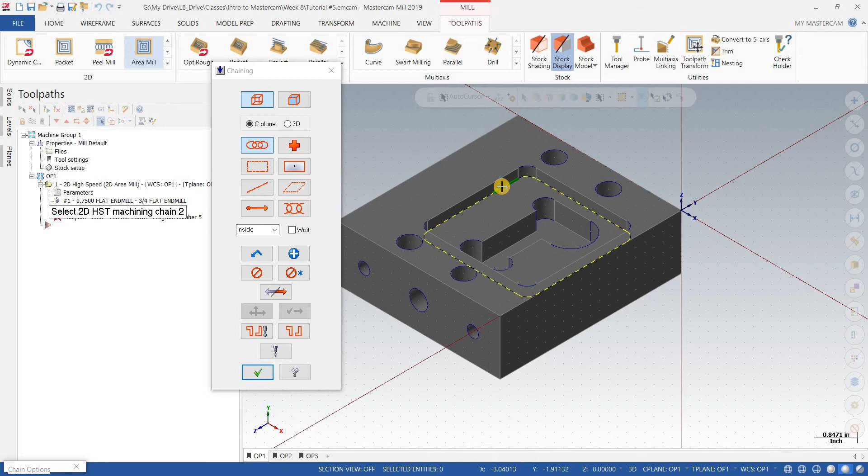We're going to start out by area milling this top pocket. Hit the drop down, area mill. We're going to have stay inside because this is a pocket. We definitely want to stay inside on this one. We're going to pick our machining region. We're going to have construction plane set, and we're going to pick this pocket right here. We can preview the chains, make sure it's doing what we want.

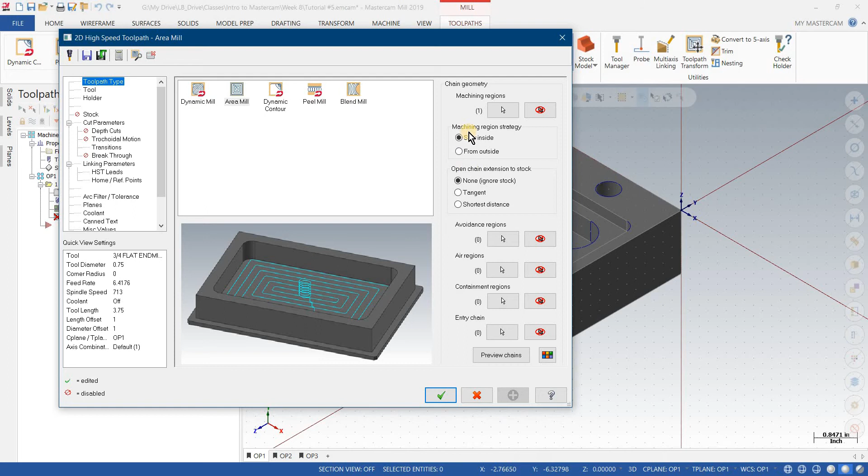So once again, here's our toolpath type. It's an area mill. We can look over here. You can see our machining regions. We're staying inside. Don't need to extend to stock. If we wanted to see again, preview the chains, you can see right there. Moving on down, we're going to pick our 3/4 inch flat end mill, which happens to be right there. And let's just give us a comment. Machine top pocket.

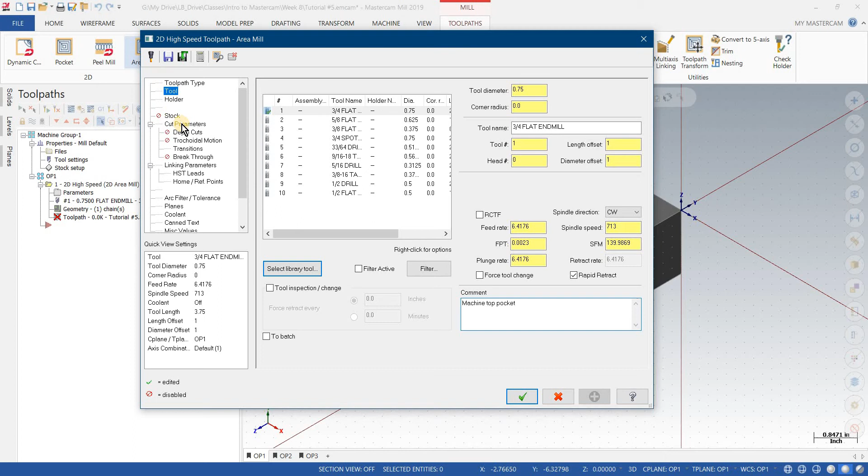Let's look at our cut parameters. Now here's what the tutorial has us doing. It has us turning on corner rounding and leaving nothing on the walls and leaving nothing on the floors. So we're using this as a finish pass, but we're turning on corner rounding. This can work, but it can also leave stock in places that you don't expect it to be because this corner rounding is cutting corners. So depending on your tolerances, this is probably not a good idea.

But then again, I would probably be leaving a little bit on the walls and coming back with a contour to clean anything like that up. So in which case I would be using corner rounding, but I would be coming back later to contour the walls. But we're going to sort of follow along on the tutorial on this. We're not going to leave anything on the walls, and we are going to turn corner rounding on.

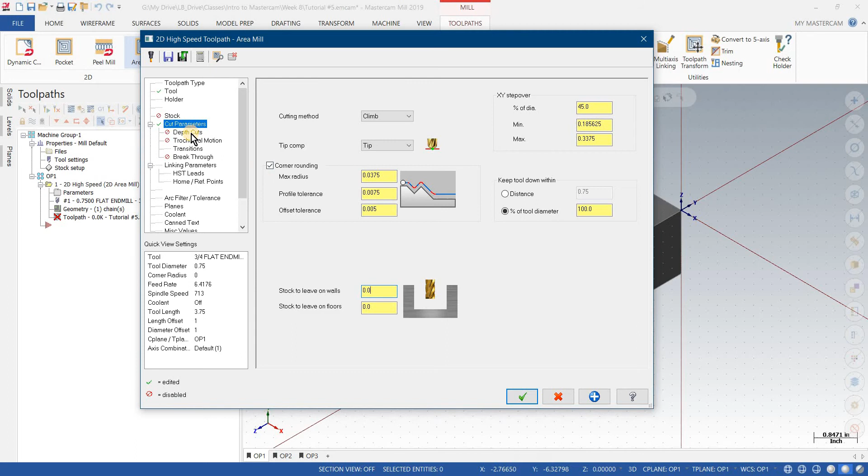Depth cuts. This is an area mill. It's not a dynamic tool path. So we're going to set our max rough step to 1/4 inch with a 50 thou finish step. Entry method. The tutorial has us using an entry helix and setting it to 0.5. I do not like that, we have a 3/4 inch tool.

So if we set our radius to 1/2 inch, we're going to leave a boss in the middle as we're helixing down. And then we're going to have to machine that boss off, which is kind of a pain. So I'm going to set my entry helix to 0.37 so that I don't leave that boss. I might also just do profile ramp, which I kind of like. But for now, we're going to helix down at a 0.37 radius.

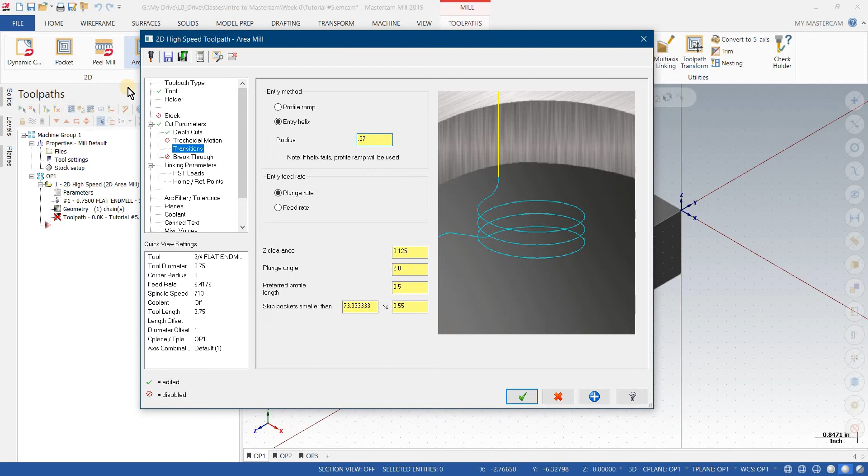Linking parameters. We're going to set our clearance plane to 1.0. Our retract to 0.5, our feed plane to 0.1 incremental. Top of stock is 0 absolute. Depth is going to be 0 incremental.

Now this is important. We're using incremental for a reason because we're going to copy this tool path and change the geometry. So by having it set to incremental, it associates it with the selected geometry rather than an absolute 0 of the part. This allows us to copy the tool path, just change the geometry and reuse settings, and the depth will follow whatever geometry we select. Let's go ahead and preview the tool path. You can see what's going on there.

Now let's take a moment and take a look at this tool path. I have said multiple times that area mill is an old tool path. There's really no reason to use area mill and that you should mostly use dynamic. This is sort of true and sort of not. It's certainly easier to program using dynamic, but let's compare the two tool paths and see the differences.

You see an area mill, it's a nice predictive tool path. It just keeps going in predictive circles, or squares in this case, but it's stepping out, taking another pass, stepping out, taking another pass. And let's compare that to a dynamic mill and see what that same pocket would look like if we dynamic milled it.

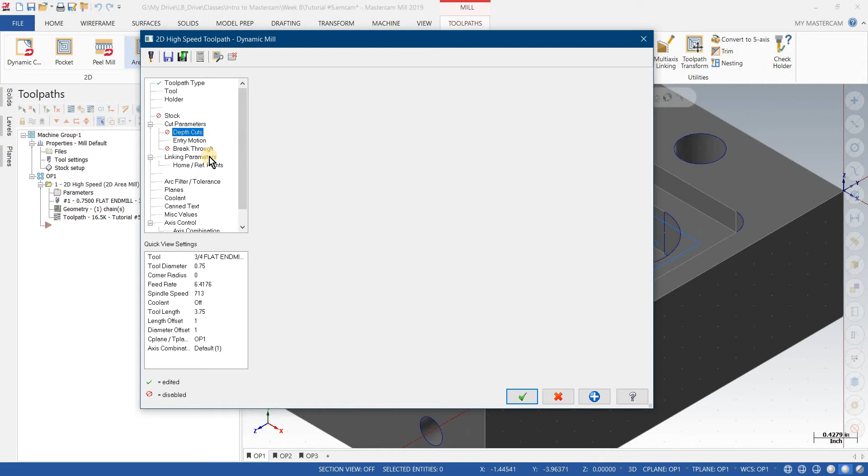So we're just going to change that to dynamic mill right there. We can turn off depth cuts. Doesn't matter, come down, everything else should be the same. Take a look at this. Now look at that tool path right there.

So what dynamic mill is doing is it's doing some flowy paths to keep from over engaging the cutter into the corner. It's coming around, leaving some material, and then coming back at a different angle to minimize cutter engagement. And this is what it does to allow you to use the full flute length of the end mill, and we don't have to do so many depth cuts.

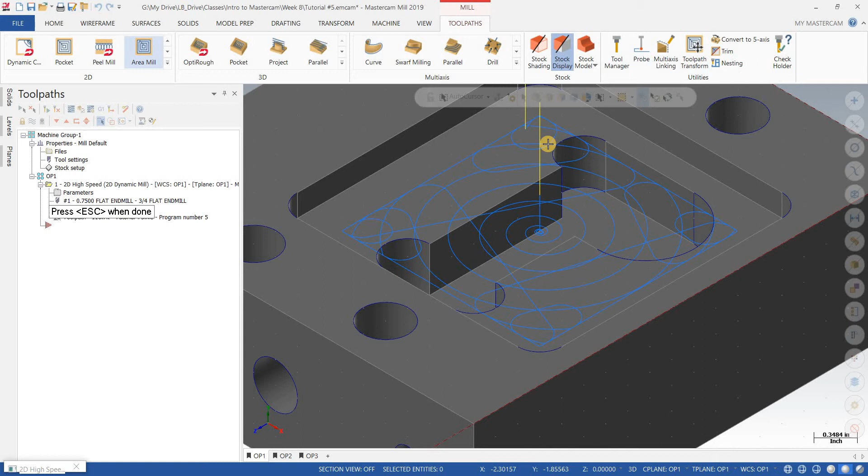But what it does is it leaves kind of this flowy pattern on any floors that you're machining. Some people may not like those flowy patterns. It can also be a little bit slow when you could get by with an area mill. So let's go back and change it to an area mill.

Now we see this tool path, and let's backplot this. And let's look at how long this tool path is going to take. So that's 5 minutes and 29 seconds. Now that's ridiculous. That's because we use the default settings in Mastercam for speeds and feeds. But we can still use it as a comparison to look at the time for an area mill versus a dynamic mill. So let's remember that, 5 minutes, 29 seconds.

Let's go back to our parameters, tool path type. Now we're going to change that to a dynamic mill. Rebuild that, backplot that, look at our info, 7 minutes and 34 seconds. So 2 minutes slower to machine this pocket with the dynamic mill.

Now, if we had to take multiple steps down with the area mill, if this was a 1-inch pocket, now dynamic mill becomes a big advantage because we could go all the way down and do one pass with the dynamic. But in these short pockets where using the whole flute length isn't advantageous, an area mill will be faster because it won't be going back and doing that flowy tool path around.

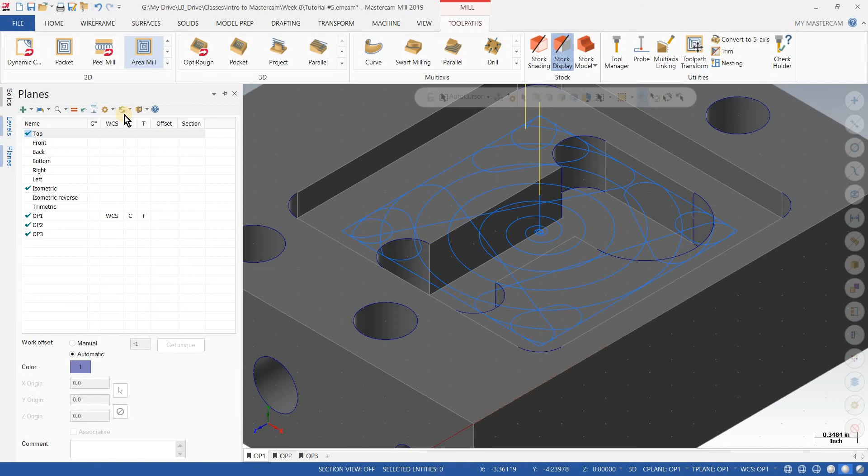So dynamic mill is a little faster for programming, but the disadvantage is it can leave an interesting pattern on the bottom of the part that some people don't like, and it is actually slower in areas where you wouldn't be doing multiple depth cuts with the area mill anyway. So let's go back and change that to an area mill because that makes more sense. Rebuild that tool path so we can see it.

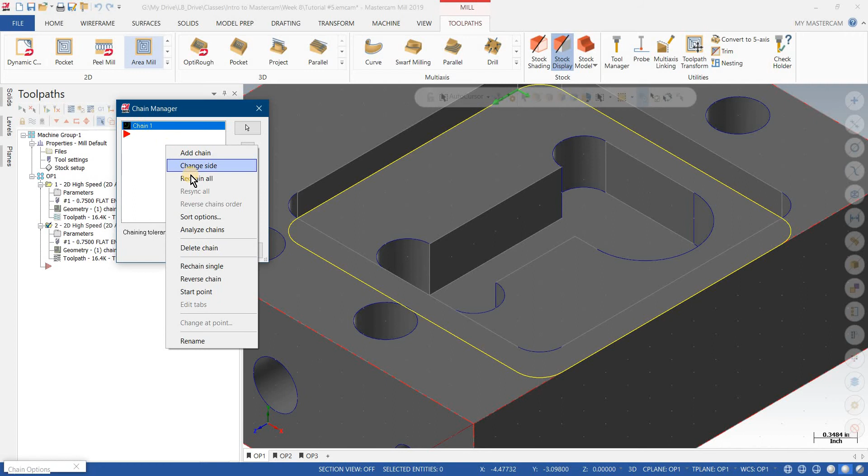And now we're going to use the same area mill to machine that bottom pocket. So let's just right click here, drag down to here, and say copy after. Let's drag our red arrow down so new toolpaths are created in the right spot. Then we can click on our geometry. We're going to change the machining region. Now we're going to be at the bottom of this pocket, so we need to say rechain all. Click down there. So there's a new pocket that we're going to be machining.

That's good. Okay, but we need to go into our parameters. We're not going to get down there with a 3/4 inch end mill. We're going to go down there with a 5/8 inch end mill. Cut parameters, I think everything else can be the same. We're not changing that. Depth cuts, oh, we need to turn depth cuts back on, 0.25.

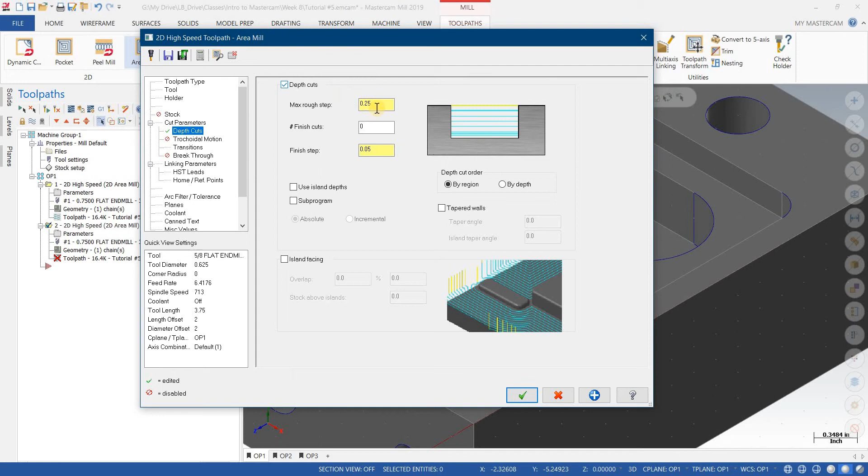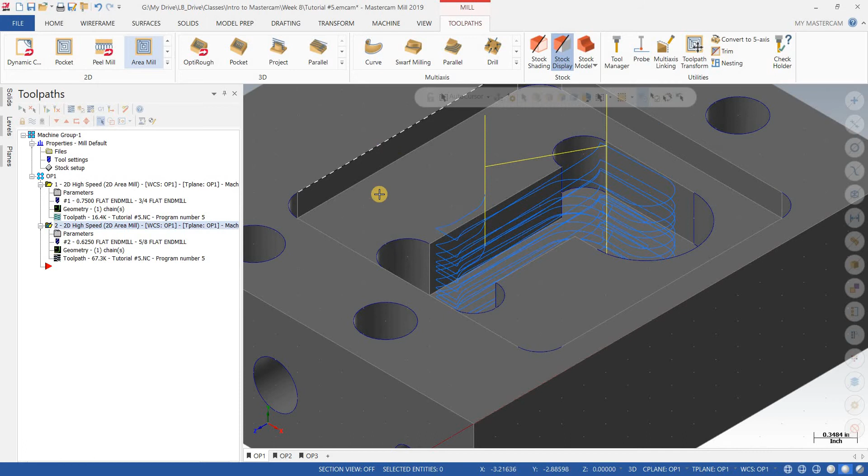Transition, entry helix. This is not going to work on such a narrow pocket. We're going to change this to profile ramp. It's going to save us a lot of time, and we wouldn't be able to helix down there anyway. Linking parameters stay the same, 0 incremental, so that we machine this pocket here. And let's preview that. Notice how it's following the profile of our pocket all the way down. Okay, so that's roughing in these two pockets with a 3/4 and 5/8 end mill.

So let's go ahead and copy these two. We need to finish these with a smaller end mill to get, for example, these corners and areas where the end mills wouldn't be able to get in. So we have both of these selected. And I'm going to right click, drag to the red arrow, let up, and say copy after. Drag our red arrow down.

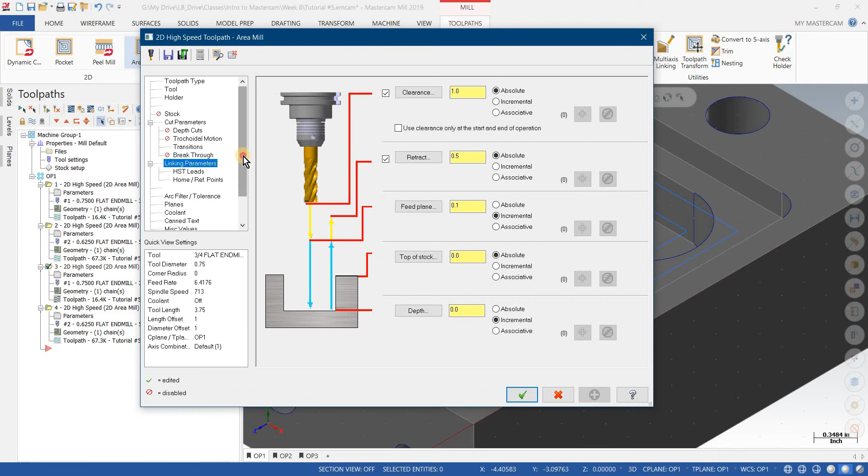So let's go ahead and modify this first one. The chain is going to stay the same. The geometry is going to stay the same. But we're going to come up here and change our tool to 3/8. And now we're going to use this stock parameter. We haven't used this stock parameter much. So we're going to turn on rest material. What this is going to do is remove material that was left behind by another operation.

If you select all previous operations, it will be huge. It's going to take a ton of time. The computer is going to have a really hard time doing that, and the more toolpaths you add, the harder it's going to be because it's going to keep analyzing. So what we want to do is select one other operation and just select that first toolpath because that's the pocket we're working with.

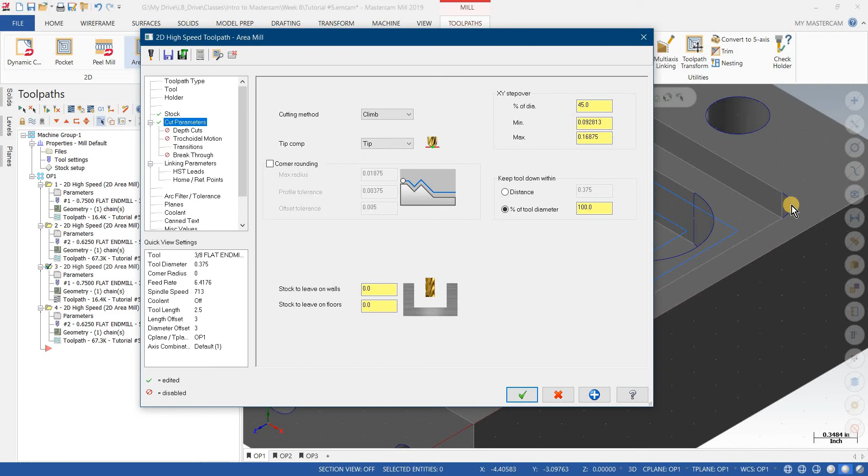Everything else pretty much stays the same. Corner rounding is on. Let's turn corner rounding off so we can get into those corners. We're only going to be doing a little bit right over here. Linking parameters stay the same. Entry helix. Let's take a look at what that looks like. Yep. So we're just going to come in and clean up these corners where the other end mill couldn't make it.

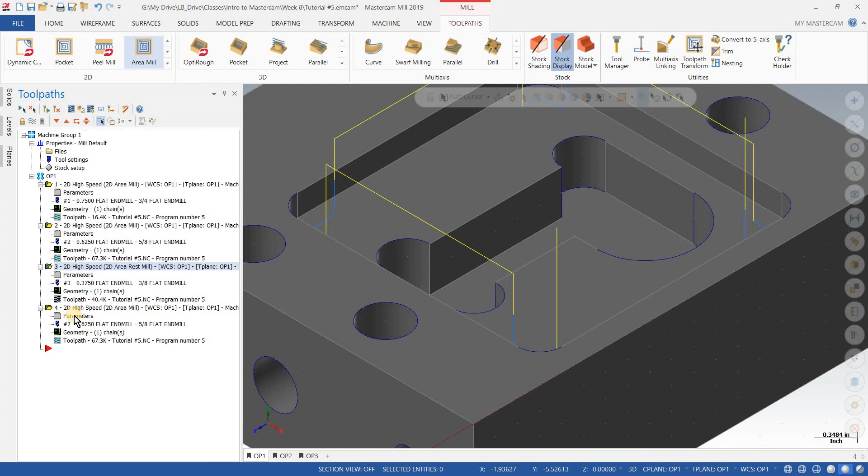And now let's do the second one here. Parameters, tool, 3/8" flat end mill, turn on stock, rest material, one other operation, second operation, everything should stay the same.

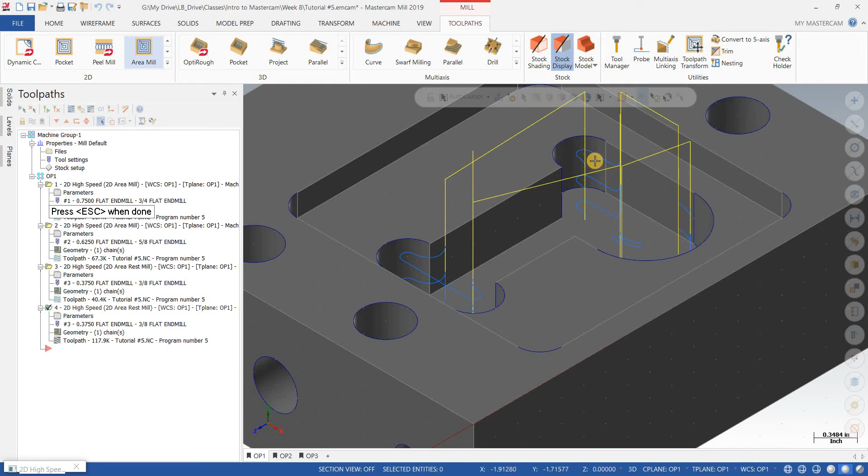See what that looks like. So there again, coming in, we're doing 3 passes in each of these corners. Not optimal. I think a dynamic mill or a contour going to full depth would make that look better, but this is going to work and it's going to give us our part. The green checkbox out of there. Off we go. So now we need to drill these 4 holes.

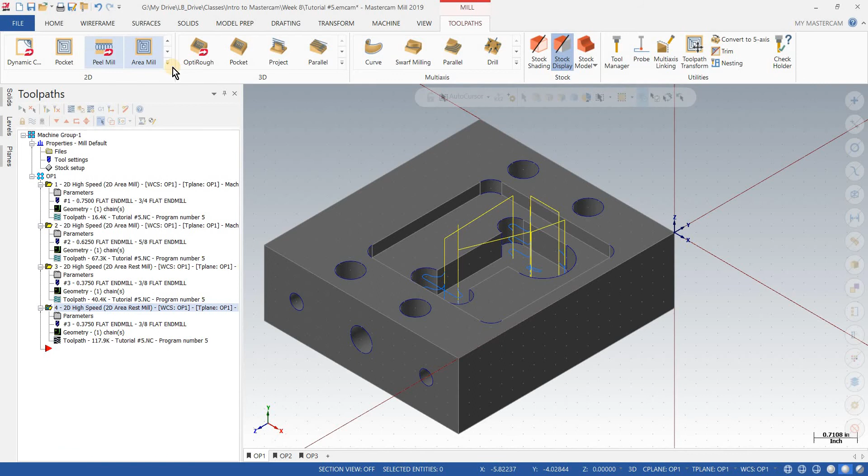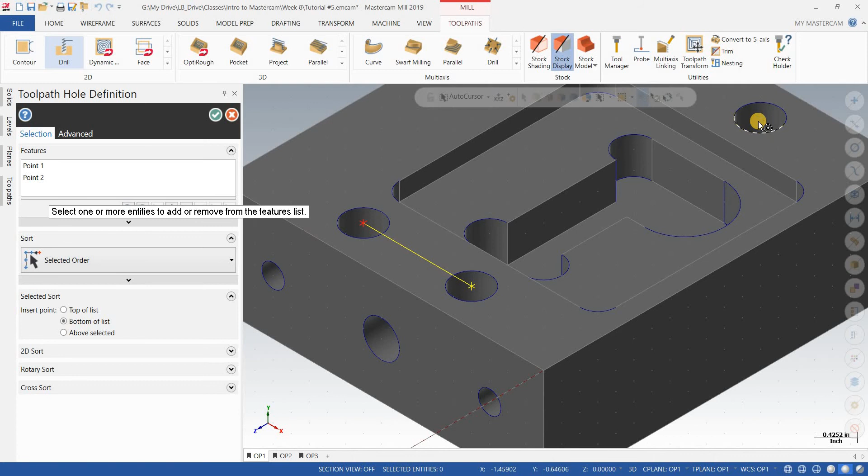Drilling toolpath. Let's unpin that so we can get a little more room in here. There's a little cursor that shows center of hole. Click on that. You're going to come over here. You want to see the cursor showing the center of that arc. Come over here. Boom.

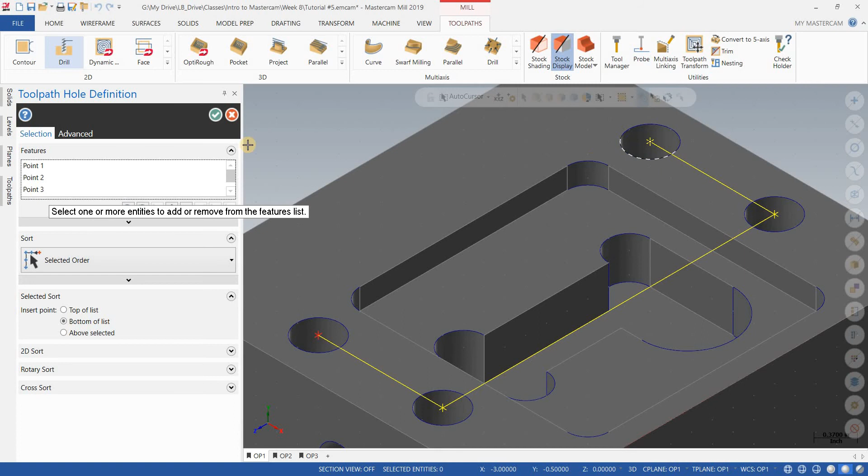So let's see. If I were to click right there, notice it clicks on the side of the part. I have to wait until I see center of hole. So I'm now going to click there, like that. And now I'm going to go in and delete my hole 4. I'm just hitting the delete key there to get rid of that mistake hole. So now I have 4 holes. 1, 2, 3, 4. Good to go.

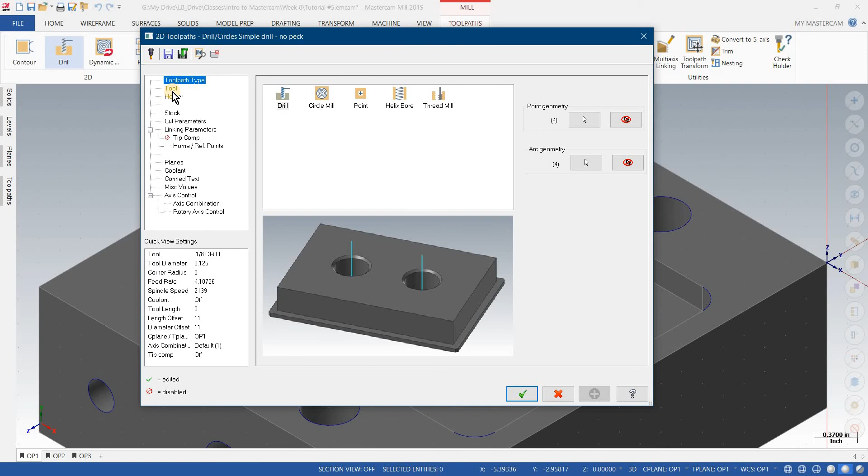Okay, and let's look over at our tutorial and see what size drill we're using. I'm assuming because we're going to start out by spot drilling the holes. So that means our tool is going to be our 3/4 inch spot drill. Cut parameter is going to be drill counterbore. We're not going to dwell.

Let's go back and give it a comment. We're going to have to go back and add some comments to the other one since I forgot to add comments and since I copied toolpaths. I have some bad comments in toolpaths, which would be really confusing for the operator. Spot drill the 4 holes, OP1.

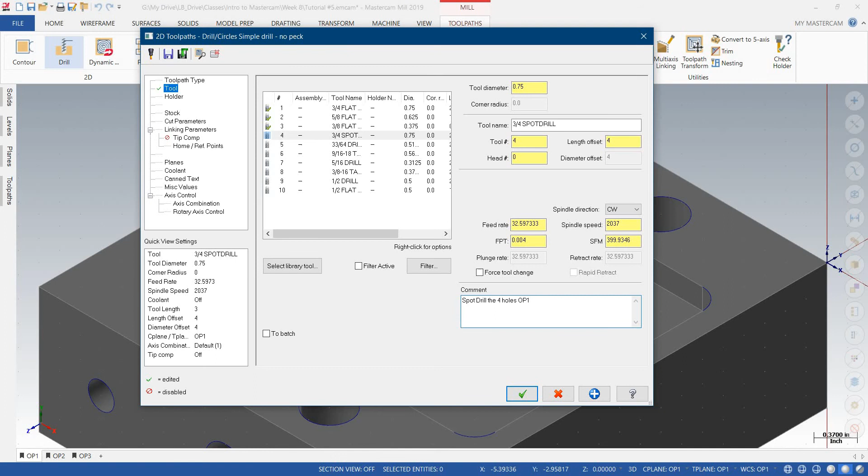Okay, so let's go down to our stock. Make sure use stock is not selected. Cut parameters, drill counterbore. Linking parameters. All this is good except for our depth. Since we're spot drilling the holes, we just want to spot drill the hole and create a chamfer on that. Hole's going to be 9/16 plus a 50 thou chamfer.

So we're going to use our depth calculator here. And up here for finish diameter, we can just use Mastercam's math functions and say 9/16 plus 0.05 for a little bit of chamfer. And we're going to overwrite the depth, which gives us that depth. And there we go. Let's go ahead and preview that toolpath and see how it looks. Looks about right to me.

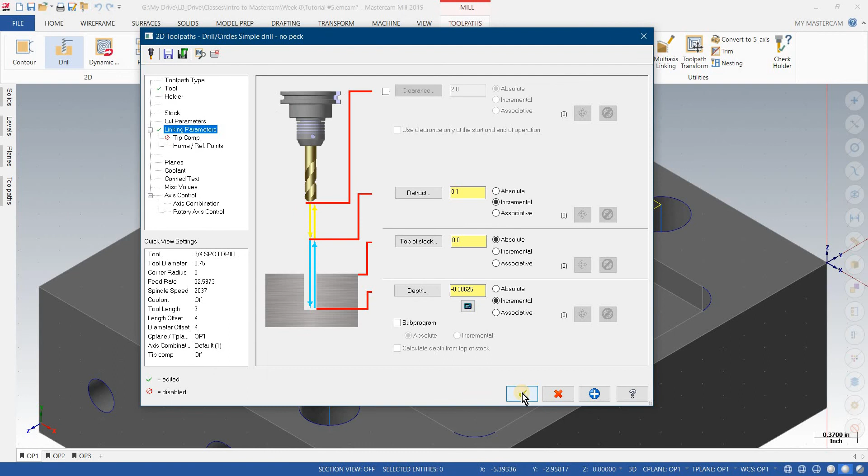Okay, let's bring our toolpaths back out here and pin them, since we're going to need to be using them. So we spot drilled those holes. So next thing we're going to have to do is drill them to depth. So let's go ahead and just copy this down to here. Move our line down here. Now open up our parameters. We don't need to change the geometry. We're using the same 4 points. Go to our tool. We're going to use a 33/64 drill.

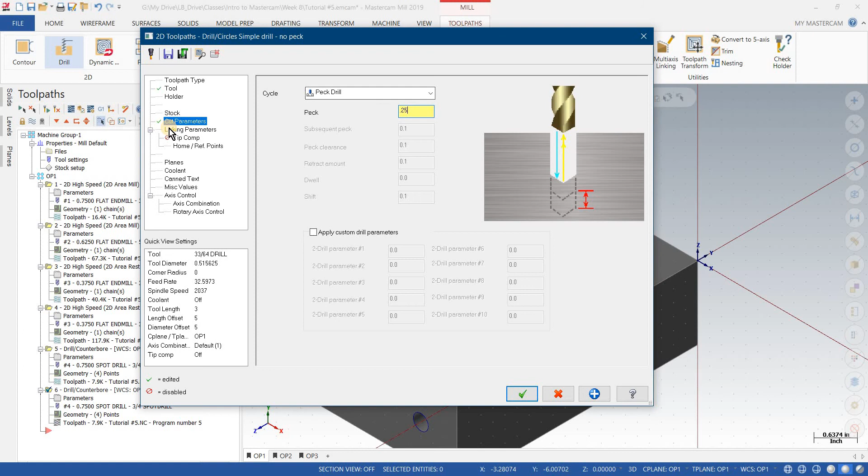Okay, cut parameters. Let's peck drill this. Let's use 1/4" pecks. Linking parameters. We're going to drill these to depth. So let's just hit the depth button here. Click on the bottom of our part. So I could go -1.5". Let's change that to absolute. Doesn't really matter, but we're going to change it to absolute.

Okay. And tip comp, we want this to come all the way through. So we're going to come here, breakthrough amount. Let's just go to 0.1. Make sure that tip gets nice and clear. Okay. Rebuild the toolpath. Make sure it's going all the way through. Yep, it's going all the way through.

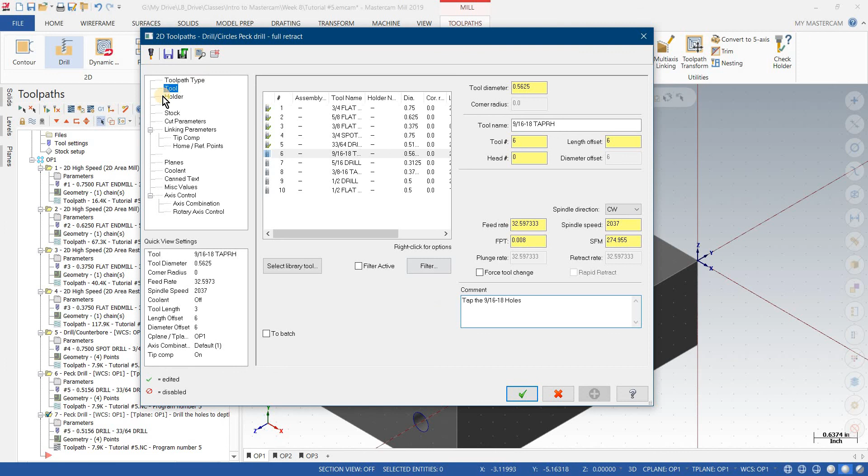Okay, so now we need to tap these holes. So once again, let's copy here, copy after, bring our red arrow down, parameters for this. Tool is now going to be our 9/16-18 tap. Tap the 9/16. Change that to a tap.

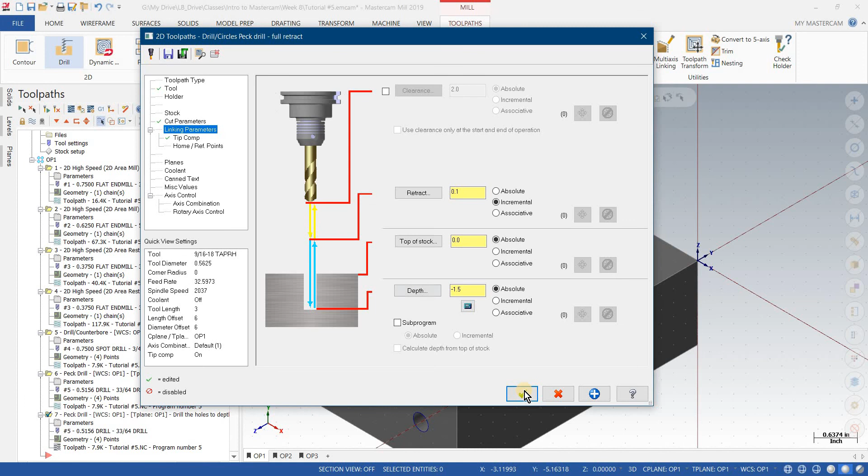Linking parameters, this can stay the same. Tip comp, notice the change in our tip angle, but our breakthrough amount is the same, so that's all going to work just fine. Rebuild that toolpath. Okay, so there are all of our toolpaths for OP1. Let's go ahead and verify those and see how they look.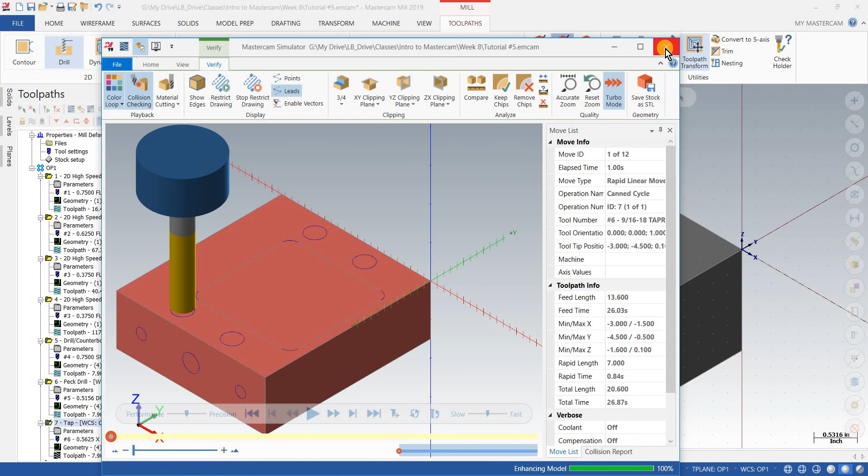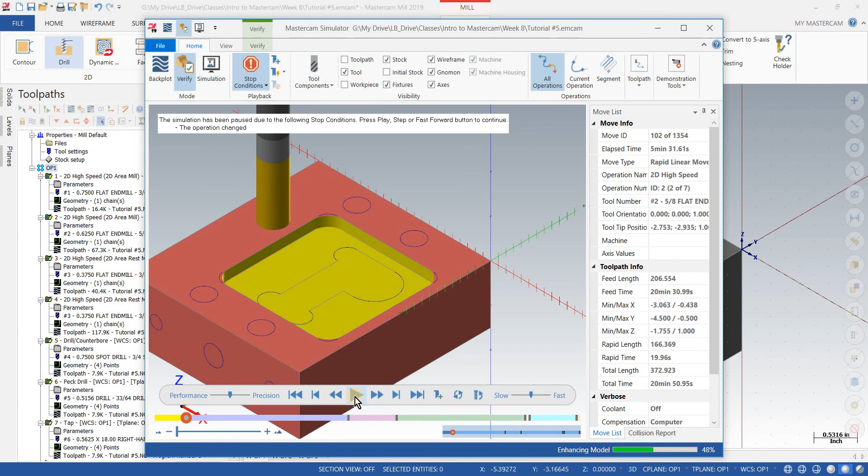So a couple of things, stop conditions. I'm going to stop on operation change so I can watch it go through on each one. Click verify. I'm going to say color loop by operation. Oh, I didn't have all my toolpaths selected. Okay, so there we go. Click on OP1, select all of our OP1 toolpaths. Verify. So we got our color loop going on. Our stop conditions are by operation change, and we can watch this cut. Okay, looks good to me. We got them all.